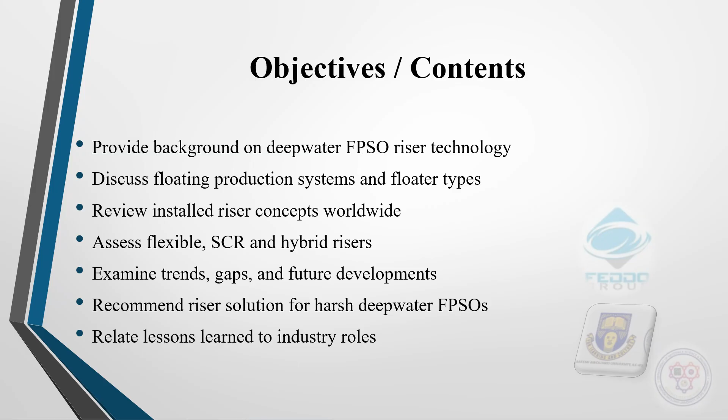For my background and state of the art, oil and gas exploration has moved beyond the continental shelf into ultra deep waters. FPSOs dominate remote or marginal fields because they combine production, storage, and offloading. But riser design becomes challenging. High hydrostatic pressure and payload and FPSO motions can create fatigue and buckling. Riser technology has evolved. Top tension risers gave way to flexible pipes, then steel catenary risers, and finally hybrid riser towers.

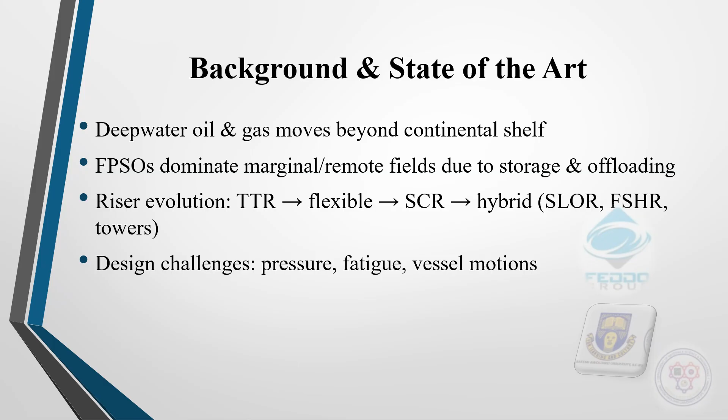For my components and floater units, a floating production system includes the hull, topside processing modules, storage tanks, turret or mooring systems, risers and subsea wells. We have several floater types. We have the FPSOs, the semi-submersibles, the TLPs and Spars. TLPs and Spars have small vertical motion, so they can use top tension risers. But the FPSOs, on the other hand, move more, so we need riser systems that either tolerate motion or decouple it.

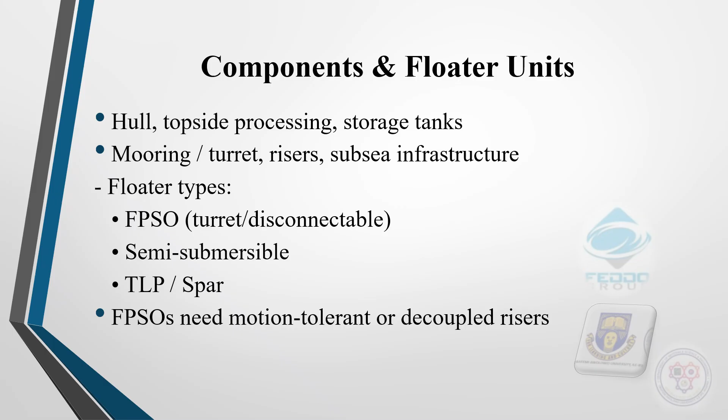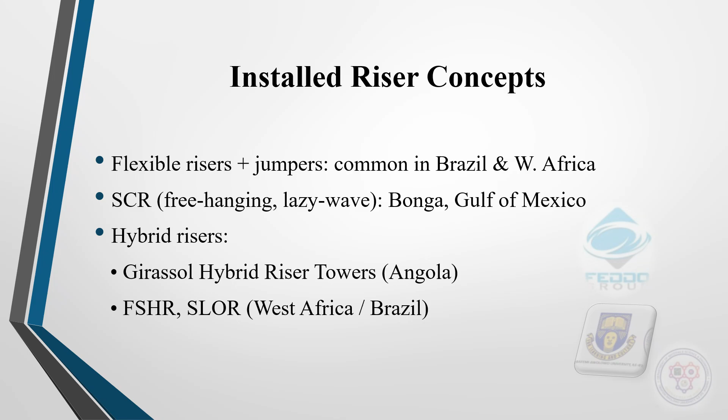For installed riser concepts, worldwide three main solutions have been used with FPSOs. We have the flexible risers and jumpers, which are common in Brazil and West Africa. They are easy to install. We have the steel catenary risers, which are applied in Bonga, also Gulf of Mexico and elsewhere. The lazy wave configuration adds buoyancy to reduce fatigue here. We have the hybrid risers, like the Girassol hybrid riser tower or freestanding hybrid risers, which separate vessel motion from the main pipe.

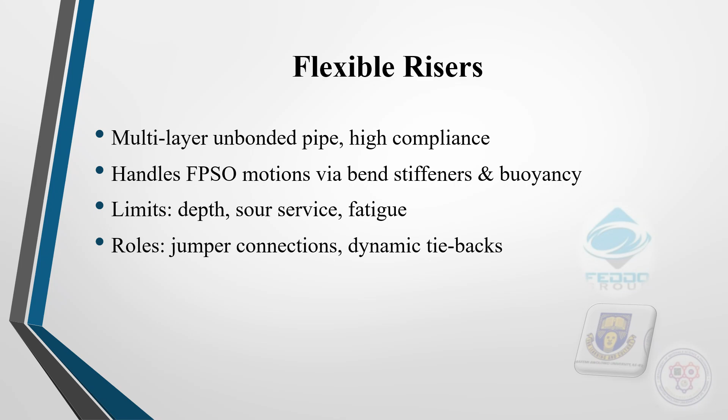So flexible risers are unbonded pipes made of several layers, like the carcass, the pressure sheath, tensile wires, and outer cover. They are highly compliant, so they handle FPSO motions well, especially with bend stiffeners and buoyancy. However, they are limited by water depth, sour service, and fatigue in harsh seas. So today they are mainly used as jumpers or dynamic tiebacks.

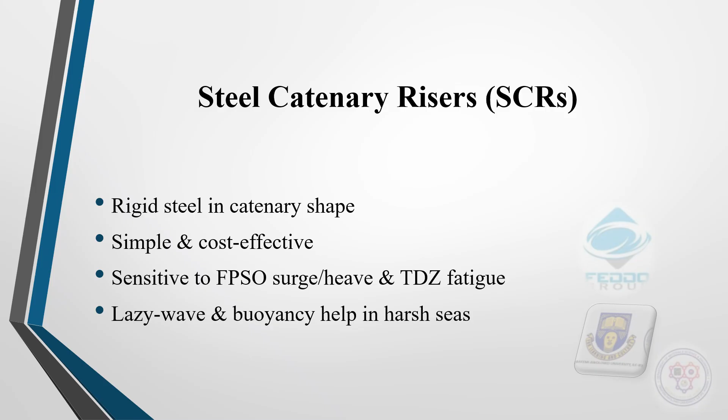For steel catenary risers, these are welded steel pipes hung in a catenary shape between the seabed and FPSO. They are simple and cost-effective, but sensitive to FPSO surge and heave. Fatigue at the touchdown zone is a big issue. A lazy wave configuration, where buoyancy modules create a wave shape, reduces top tension and seabed fatigue.

Hybrid risers stand vertically from the seabed, held by buoyancy cans, and connect to the FPSO with short flexible jumpers. This design decouples FPSO motions, keeps fatigue low, and allows quick disconnection in an emergency. They suit harsh areas, like the North Sea or Gulf of Guinea, where FPSO motions and storms are severe.

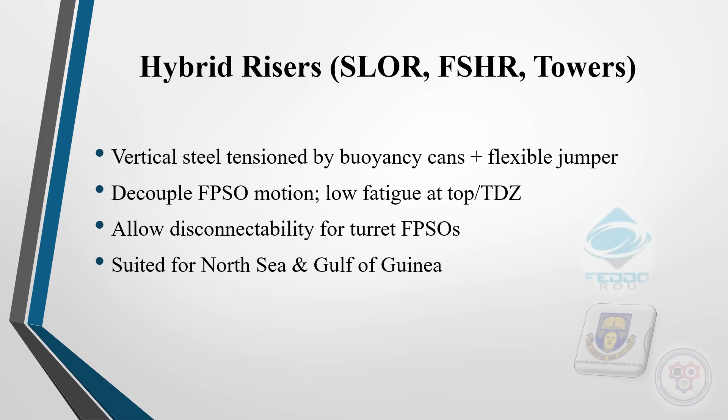Now, for the lessons and recommendations, from all concepts, hybrid risers give the best balance of strength, fatigue resistance, and operational flexibility for harsh deep water FPSOs. Steel catenary risers can work where vessel motions are moderate, and flexible risers remain vital for jumper sections.

The lessons also show how different roles contribute, like the design engineers select and analyze concepts, installation contractors manage tower tow-outs and hookup, operators handle inspection and integrity management. So my recommendation is a group of SLORs or a bundled hybrid riser tower for a disconnectable turret FPSO in harsh deep water.